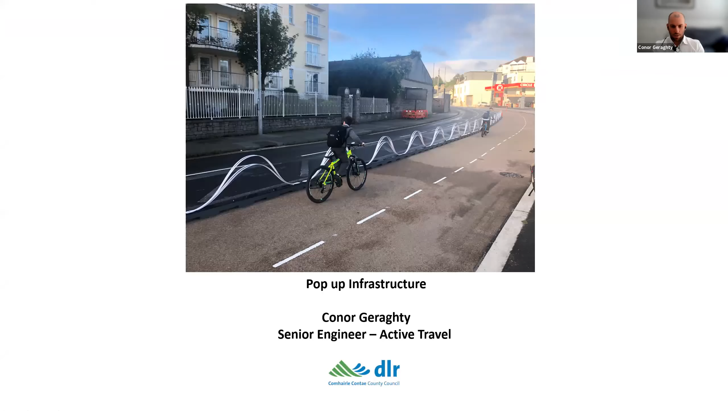It's showing, yeah, perfect. As Finola said, I'm senior engineer for Active Travel, and I've been involved in much of the pop-up infrastructure over the last 12 or 14 months. You'd be glad to hear this is probably the wordiest slide I have, but just to cover some of the basics about what pop-up infrastructure is.

To my mind, it's infrastructure that can be deployed very quickly, and it's often bolted down, working within the existing constraints and not requiring road widening or drainage alterations, and can facilitate things like parklets or cycle routes. It can be removed easily, which is one of its big advantages, that it enables things like trials to happen.

And why would you use pop-up infrastructure? Well, obviously the short design and implementation time is a real positive, but it also enables you to react to issues quickly, like the need for cycle facilities like the coastal route, or more recently the outdoor dining, where parklets and tables and chairs have been deployed in pop-up fashion.

It can also help resolve complex issues like concern over traffic movements or displacement and layouts. Pop-up infrastructure could be as simple as setting out a row of cones to make sure a resident could make sense of a particular new layout that's proposed, and it can facilitate those issues so they don't escalate too quickly at the early stage of a process.

One of the main advantages to it is that it can deal with the what-abouts. So what about traffic displacement? Rather than trying to go down a rabbit hole of modeling, or particularly in the moment during COVID, where modeling isn't really giving accurate results, you can use real-life trialing to deal with question marks that can't really be dealt with before something is built.

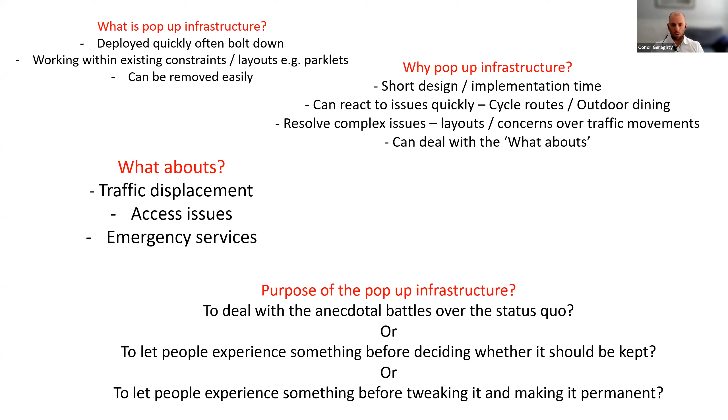So there are three very different, slightly different prospects, with the last one being a decision is taken to do something, and the pop-up measures or the trialing is a way to make sure that it works perfectly for everybody. The question is not whether it should or shouldn't go ahead.

If you're delivering pop-up infrastructure, the engagement is really important. We had experience last year where we were deploying measures without prior public consultation. So something like an adaptive build model is really important, where you've got this circular process where you put in something, you evaluate it, you talk to people, you see is it working or not. If it needs to be changed, it's changed, and then it's evaluated again. It goes around in this circular process.

One of my lessons learned from the whole thing is that you really have to champion the engagement. If you're open to change and you're making changes, that you're seen to be making them, it helps build trust with the people that schemes affect. Early versions of some of the pop-up infrastructure, by the time we had gone through a year of it, people know you, you've engaged well, and there's a certain element of trust that's built, which is really important, particularly for trialing.

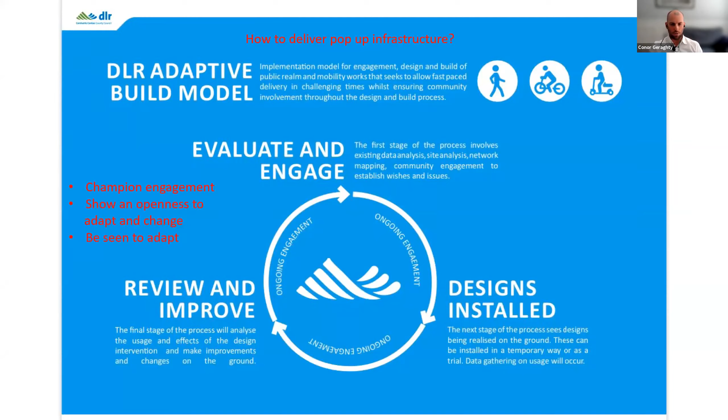So ultimately, what are we trying to achieve? It's active livable spaces. I think that applies to all of the infrastructure that we're looking at, even if it's permanent or pop-up. It's this style of an active landscape.

Not to quote Jan Gehl at an Engineers Ireland talk, but it's about the activity, the life between the buildings. Examples like this, where people are going around their daily life in an active way, but also that there's life on the street, that it's not just a place for movement through, that it's somewhere where people come and linger. This is an example from Dún Laoghaire of the Metals, where people come and sit and linger, and then they're more likely to spend money and spend time in an area.

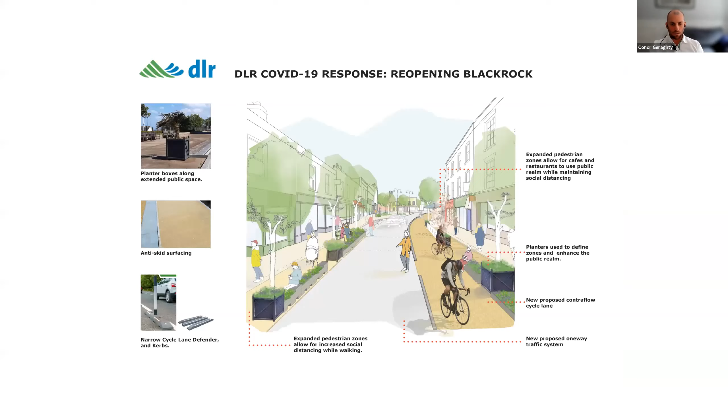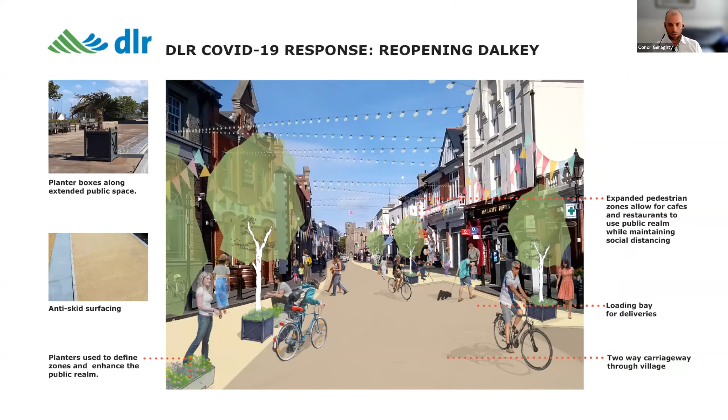One of the really good positives from pop-up infrastructure is the ability to do something really, really quickly. For those that don't know the coastal mobility route, it's a 4.5 kilometre route where 3.6 kilometres of it is two-way segregated cycle track, and that entire length was delivered in 5 weeks over 5 different sections.

Just to give you a sense of the speed of deployment: on the first day at 10 o'clock, when our road opening license kicked in, the cones were set out along the central line of the road and the top 2 cones were put in on the no entry sign. So pop-up infrastructure in its most basic form is traffic management. That first 600 meters is secured and the space is there for everybody.

By the end of day 1, all the lining had been burnt off and the parking bays were moved out. Day 2, all of the curbing was installed. Day 3 was bollards, and days 4, 5, and 6 were anti-skid on the first section. That became the limiting factor to the progress of the scheme, where we could deploy 3 meter wide, between 120 and 140 meters of buff surfacing along the route.

So after the first week, 600 meters was provided. It provided a link from Newtown Avenue, picking up the existing contraflow facility that was there, down to Seapoint Avenue. We did this section first, knowing that was probably the area that's going to get the most amount of cyclists.

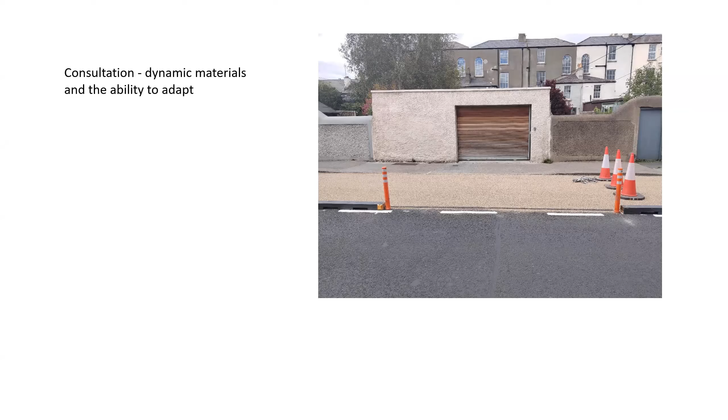If you see the timber curb on the right-hand side, it had a section cut off. We were able to just get the carpenter down - he took 500 or 600 mil off the curb and moved the bollard. It took 8, 10, 12 minutes, but it potentially removed somebody that might have had a negative impression of the scheme or object to it. It resolved the issue, and they were happy, and it helped build trust with the local authority that we did react to a genuine issue.

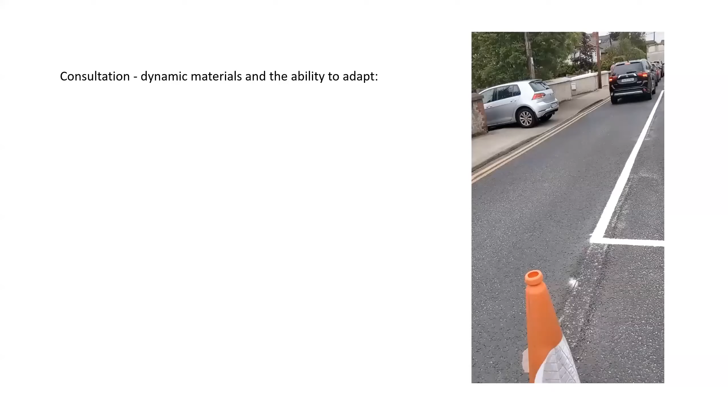Another example: people who always reverse out of their driveway and had never reversed in. Across a couple of different schemes, we arranged for traffic management guys to come down and hold traffic back and help residents try to reverse in - something they maybe had never done before. It gives them options that weren't there, like this particular person who wasn't able to reverse straight out because of the angle of their driveway, so the maneuver couldn't be done. But with a little help, they were able to learn how to reverse in and out, and that resolved the issue for them.

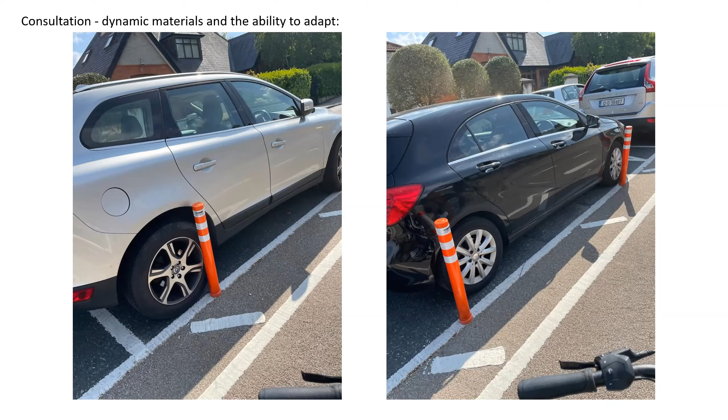Some other examples of the flexibility of the materials: we had provided bollards every 3 meters along the parking bays, but we were getting feedback that door openings were compromised by some of the bollard placements. So we went back and marked out the bays in specific sizes and the bollards in specific widths, so that if you're parked properly in the bay, it kind of hit on your wheelbase and didn't affect the door opening. Again, a very low cost intervention that helped deal with an issue at a local level.

And to facilitate the introduction of the route, a one-way system was put in, and a lot of people were concerned about the access for emergency services. I've personally witnessed 5 or 6 different responses along the coast, and the coastal route, apart from having no effect on emergency services, actually provides them with a corridor that's free from vehicles all the way along.

Cyclists are uniquely placed to be able to get off their bikes and onto the footpath if an emergency vehicle came along. I did a walk through or drive through with the emergency services, and some of the feedback I get is it's quite disappointing to see people trying to weaponize emergency service response as a way not to do cycle routes.

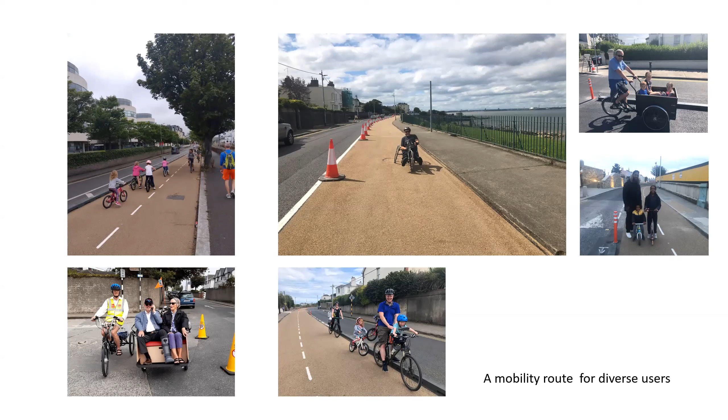So these are just a few shots from the route, and I think what struck me at the time when we finished it is this diverse range of users - young and old, people with mobility challenges. You see kids independently cycling from 8, 9, 10, and it's been a real eye opener for me that when you build high quality segregated facilities, it does attract all age groups, and it was great to be able to deliver it in a pop-up fashion. Again, just another shot of the type of users on the route.

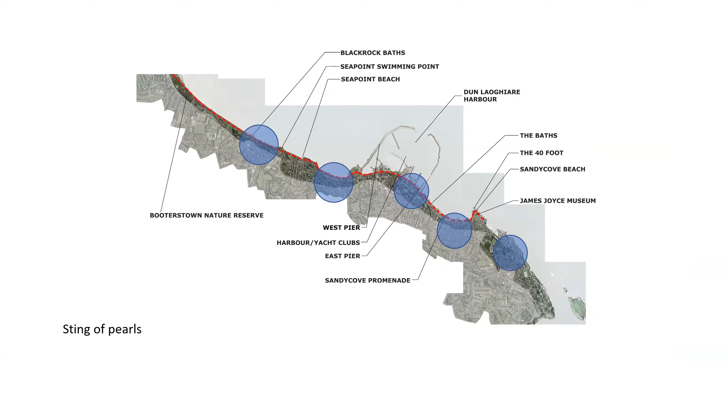I think if you take anything from this talk, a cross-departmental and multidisciplinary approach to projects is probably one of the most important things that you can do when dealing with public realm projects. And I think there's a really healthy challenging of views - conflict is probably not the right word - when you get people from different disciplines in together.

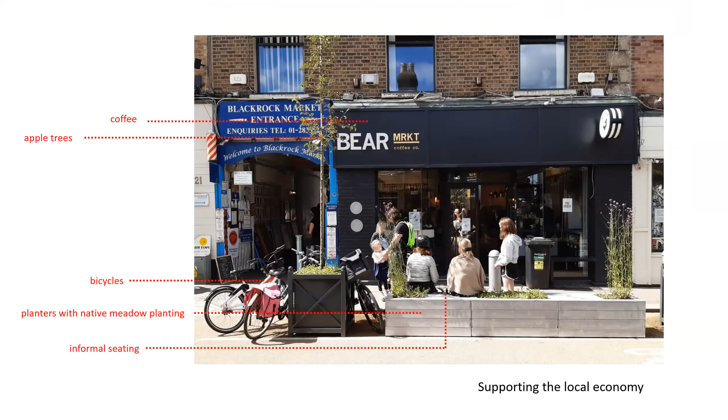Just another example of the dual use of planter boxes, where people can sit and linger in an area, providing extra seating but also the planting function.

Essentially it's a concrete that has granite aggregate in the mix, and a surface retarder is poured on it that's washed off afterwards, giving it a weathered look while being very much in keeping with the character and heritage of the town.

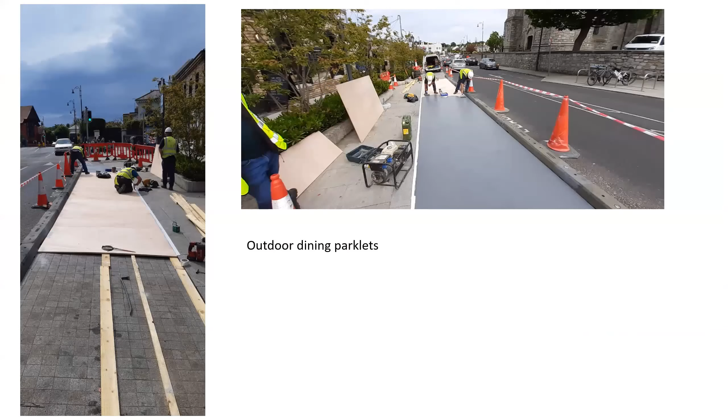Just a very quick slide on parklets, which we're looking at a lot at the moment with outdoor dining. Parklets can be popped up very quickly - this particular one is about 25 meters long and can be dropped in a day. They can then be dressed with the same style of planter boxes filled with plants, and personalized depending on the business. Developing a recurring theme and style to your planters and parklets enables you to react very quickly with stock pieces when needed.

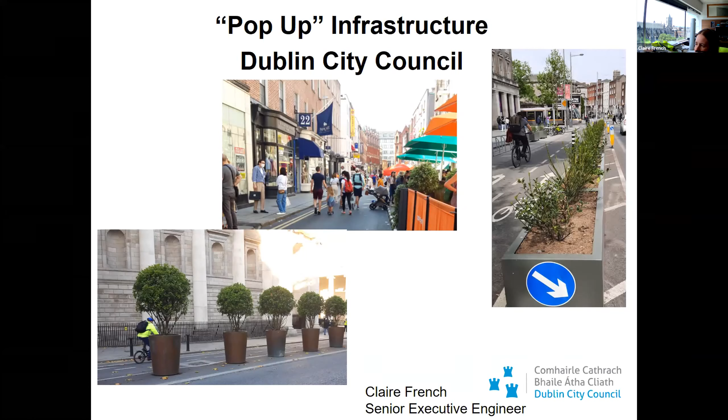Good afternoon, everyone. We've had a very busy 12 months here in the city, with some really interesting things happening for pedestrians and cyclists. From early 2020, the traffic department here, led by Brendan O'Brien, recognised that things had changed quite dramatically, and that the reduction in public transport capacity meant that when people started moving around again, walking and cycling would be extremely important to cater for some of that capacity normally used by public transport.

So a specific COVID mobility team was set up by Brendan, led by Patricia Reedy, who oversees everything, with different sections in it. I was looking after providing active travel improvements on the south of the city.

Connor's already touched on some of these, but from our point of view, some of the advantages of this kind of pop-up infrastructure are rapid deployment, the ability to trial different arrangements and materials. It's very easily adapted, it lets everyone experience the infrastructure, and there's scope to come back and improve and make measures more permanent.

So what have we been doing for pedestrians? One of the first things we started doing was a number of build-outs, to create additional space in key locations. They're quite quick to install with minimal civil works and disruption.

So it's all about reassigning some of the space for the pedestrians. We started out on Nassau Street, where there was a new contraflow cycle lane put in early last year, around April, May, which created a bit of extra space that we decided to reassign for pedestrians.

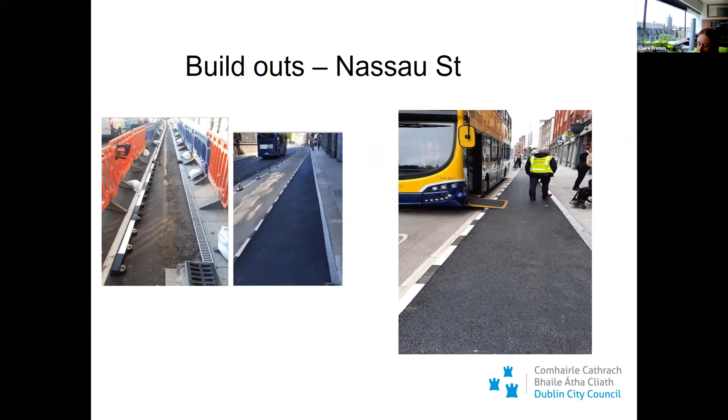So this was used as a trial for this. A very simple method: we just use ready curbs, which are bolted down, with eco drains for drainage, and then asphalt to form the space. We worked with and liaised with our drainage colleagues and made a few changes both to the drain type and how the drainage system works.

We carried out a trial with some of the disability groups as well. Although this isn't a bus stop, we trialed it as a bus stop, and we learned a lot from that, which we then took forward into our next target, which was down in College Green.

There's a number of locations in College Green that are normally very busy with pedestrians passing through and also with pedestrians waiting at bus stops. This was the first one that I looked at, in the centre of College Green. So the space was given to pedestrians, both for those waiting for the bus and those passing through.

Again, we invited the disability groups out and trialed it, and they were much happier with this, the slope and the drain type. So we now had a blueprint to go forward.

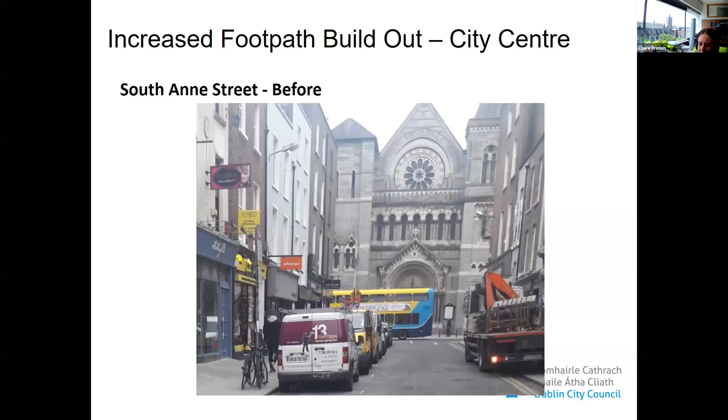I suppose what we were doing wasn't going unnoticed around the city. One of the first places that actually approached us was a group of businesses on South Anne Street back in early June last year. They were looking to see if they could get some of the carriageway space to provide room for tables and chairs.

This is what South Anne Street was, which had a line of parking and loading on one side. The first thing we did is simply close it off, which gave us a chance to see if there was any issue in the street in terms of the effect on loading and parking, but there was none. The street coped very well.

And so during our pedestrianization trials, it was an instant success. It was well used by the restaurants and cafes on both sides of the street. While we were out there on one of the Sundays, they approached us and asked, maybe could we look at doing what we'd done down in College Green for them.

So I went out on the Monday and had a look, and yeah, it was certainly doable. We were out there within a week and started to build this. Again, it's a very simple construction: the curb is bolted down, we put down a layer of sand, we've the eco drain for drainage, and then we put the asphalt on top.

They do vary—this is just a different location—and most of them don't actually need any additional drainage. If they do, we simply put down an additional pipe with a connection to the roadway to catch any runoff. We finish it with a buff colour, and the street is pretty much instantly transformed.

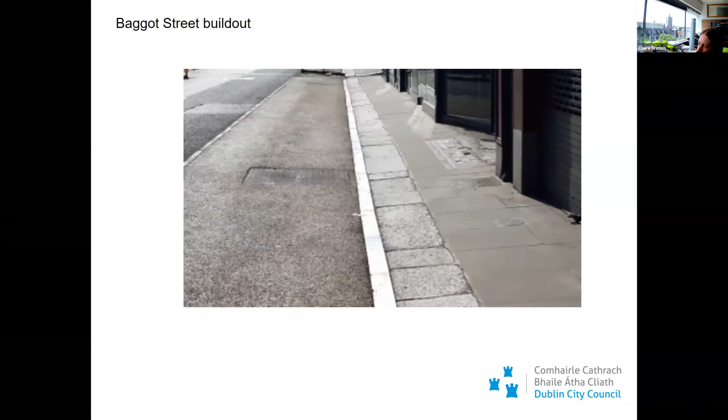Most of them on South William Street are just for pedestrians rather than outdoor dining. It's just another one up on Baggot Street, again, which is additional space for pedestrians. And when you see the build-out beside the original footpaths, you really see how narrow the footpath was before that.

We're also using them at public transport locations, so at various bus stops. So it's gone in on College Green, up on Parnell Square, which were kind of the tightest locations.

And then for outdoor dining, again, dedicated space for outdoor dining, dedicated space for pedestrians. Footpaths are cleared, and it's a real bonus for anyone looking for outdoor space. We've about 20 of these done now at this stage, mainly around the Grafton Street area, Merrion Row, Baggot Street and Capel Street.

Now that everyone sees them, everybody wants them, but it's not possible to provide build-outs at every location that's looking for one. So there are a large amount of cafes, restaurants and bars looking for space, and we've been dealing with them all the way through since last summer. But the number of applications has shot up in the last 4 weeks - we've had nearly 100 alone. I suppose we would love to build out footpaths everywhere, but we have neither the time nor the resources to do that many in that short space of time.

So we had to look for an alternative when it came to reassigning carriageway space, especially outside the very centre of the city. We needed something that was temporary and removable later on if needed, something that was very quick to install due to the sheer number we have to do, something that would provide some reflectivity and protection and awareness to vehicles that there was something happening here. Something that had a bit of height on it, so it wasn't a trip hazard, and something that maybe looked a little bit better than bollards.

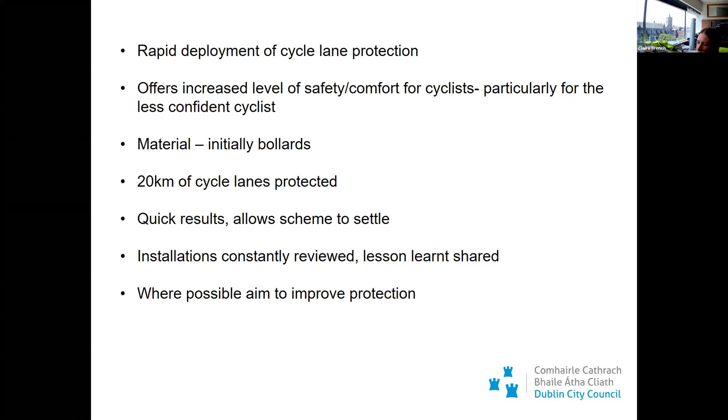In terms of a pop-up, the advantages are rapid deployment, and it gives an increased level of safety and comfort for cyclists, particularly less confident ones. We've mainly used bollards initially, which has allowed us to protect about 20 kilometers of cycle lanes in the last year. The guys out there putting these bollards in have been phenomenal - a huge amount done, out there at 5am every morning. Very quick results, changes things straight away and allows them to settle so we can see it. We constantly review them, learn from them, take lessons onto the next one, and where possible we improve the cycle protection.

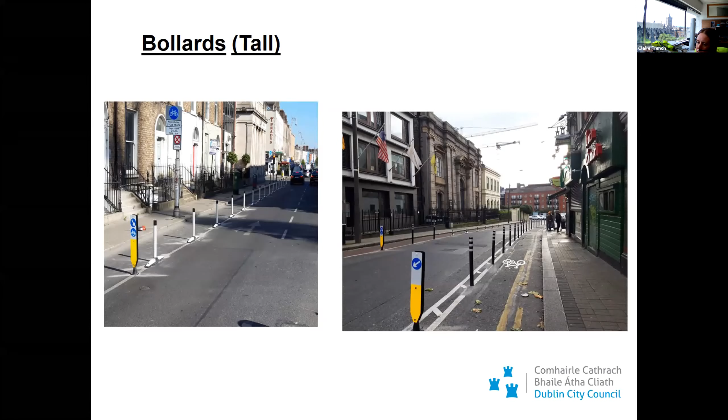We started pretty much in early April last year providing space for both cyclists and pedestrians. We have a number of different materials - some are just bollards, the taller ones, where we don't need to provide curbside access for vehicles, like on Richmond Street and Wexford Street contraflow cycle track. We also have the shorter bollards, the Sherkins, where sometimes access is needed to the curbside - we used more of them in the beginning, but we don't use them so much now unless there's really no alternative.

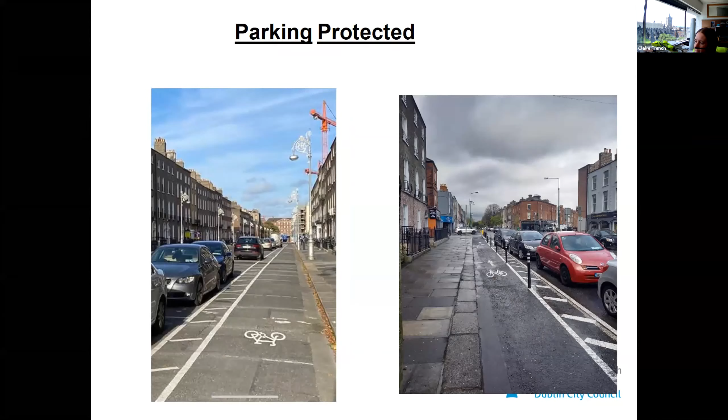Parking protected cycle lanes - this was Fitzwilliam Street on the left and Blessington Street on the right, the contraflow cycle track. Moving the parking out itself provides protection to the cycle lane, provided we can give a good buffer between the cycle lane and the cars.

On the North Quays, one of the schemes looked at very early on - there was just a bus lane with shared cycle facilities, two lanes of traffic and parking. Back in April 2020, one lane of traffic and the line of parking was taken away, and the space was assigned for pedestrians and cyclists with these red barriers up initially, placed pretty much all down the North Quays.

But working with our parks department, those barriers were never going to be there long term. We managed to install these planters instead, which totally changed things in front of the forecourts there. So instead of a line of traffic and a line of parked vehicles, you have a much quieter, much safer, and much calmer space, in quite a special location.

These ones on College Green - I put these in quite early, extending the cycle track that was there and protecting it with planters. Because it was May at the time, we just put in flowers and quite a few bollards. But we went back to it, replaced them with trees, got rid of all the bollards, including the ones on the footpath itself, to create this planter protected cycle lane.

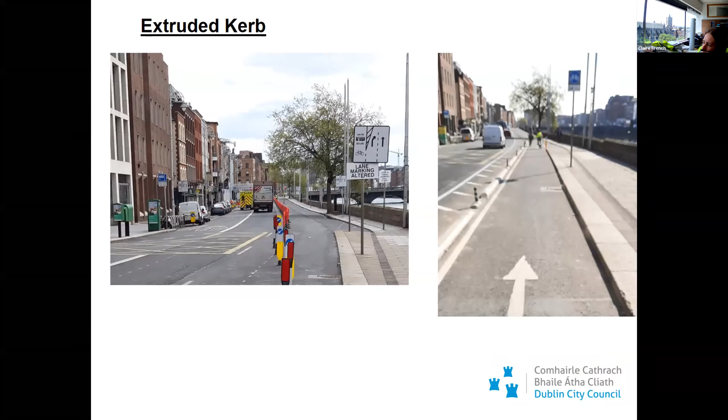The other method we're using for protection of cyclists is the extruded kerb - again this is on the North Quay. Initially these red plastic bollards were replaced by this extruded kerb, and it's also used up on Constitution Hill. Where we have the space, and depending on the setting, it's certainly our preference in terms of visual appeal and the protection it provides - it's much less intrusive than the bollards or some of the other things we use.

And it's also used successfully on Griffith Avenue as well, with the buff colour.

Just a quick note, as well as these pop-up cycle measures we've been putting in, we have also opened up a number of longer term projects in the last year.

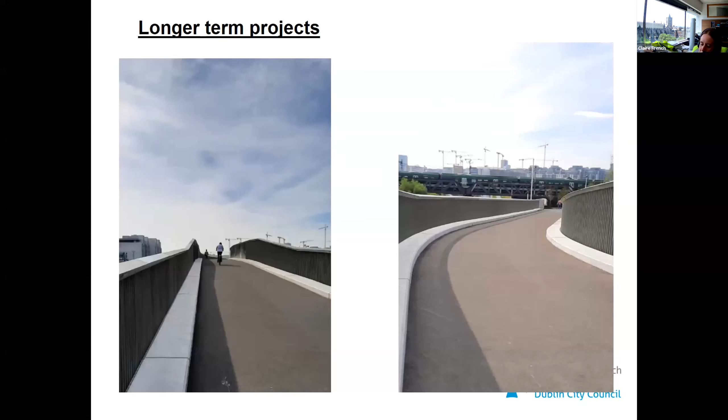The Royal Canal Phase 2 opened last summer, which was a bridge both over and under a railway line. And on Seville Place, there was some pop-up infrastructure.

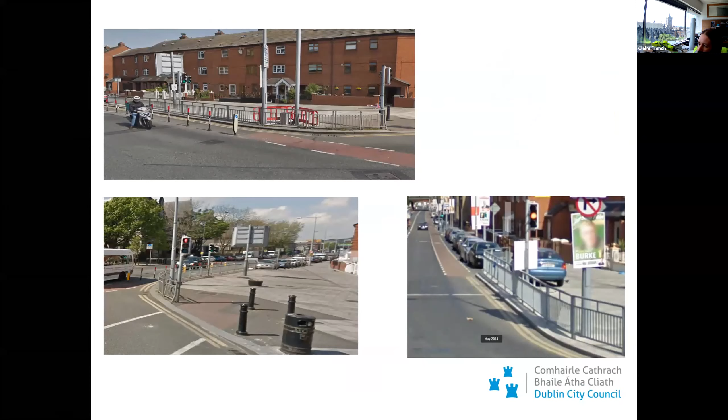After a cyclist was killed, these bollards were put in, but it was a bad junction for cyclists with the railings and everything. But the railings actually provided a safe space for children who lived there, who used that space as a playground.

So the parking was taken away, the railings were taken away, and protected cycle facilities were put in. A garden was created to provide that safe space for the children, but also to brighten the place up and improve it.

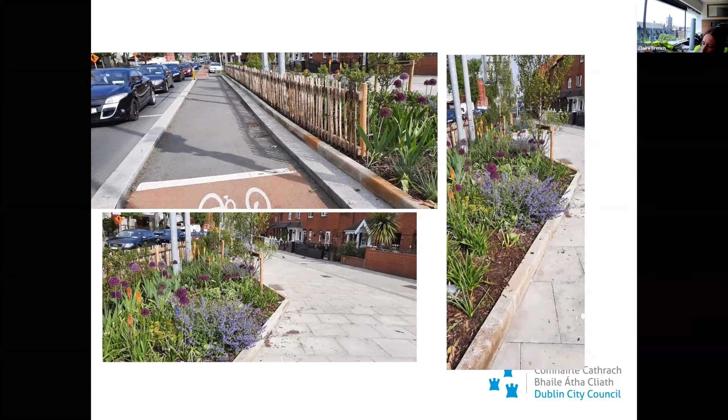Have you seen much change in volumes in the last year? Well, the traffic volumes are now back up to about 80%, and they've followed pretty much what's been happening in terms of restrictions. Obviously, they dropped significantly back last April and have been up and down a bit since then.

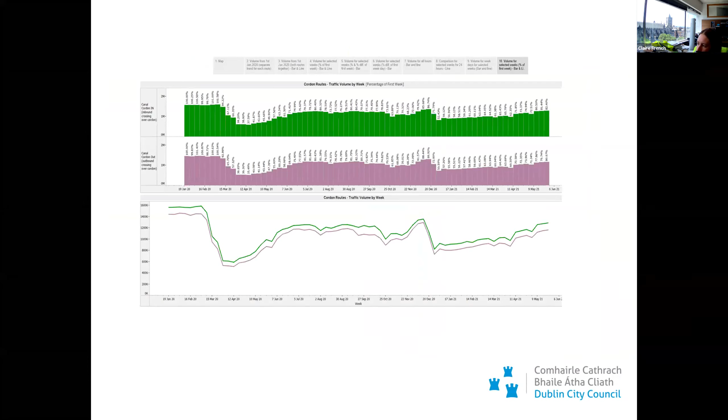Has there been an increase in cycling? Well, our commuter cyclists haven't yet returned, but we hope they will when they start going back to the office. What is positive is that, looking at the weekend cycling numbers from the first 3 months of the year, compared to 2019 and 2020, they grew by 46%. So that's very encouraging, and hopefully people will keep it up who've started cycling in the last year.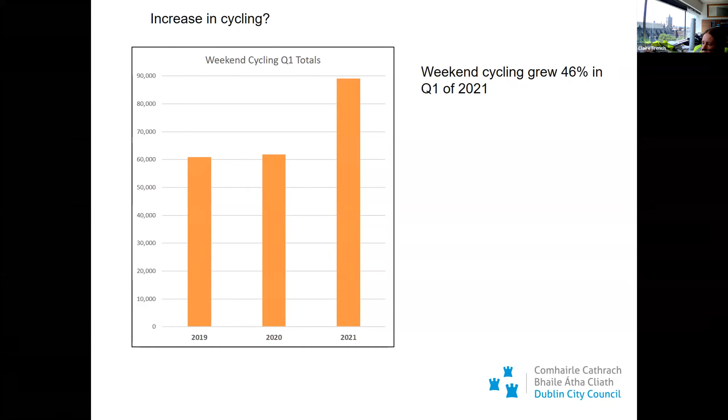In the city centre, just for May, the last few weekends compared to 2 years ago, on Henry Street the pedestrian numbers were actually greater than they were 2 years ago. So there are plenty of people still coming into the city and walking around. Grafton Street hasn't recovered as well, but it certainly has recovered a bit in the last few weeks.

So just a very quick note on consultations. We have done a lot of them over the year, and when we're doing them, we just want to think: what are we looking for? What sort of feedback do we want? And at what stage of a project?

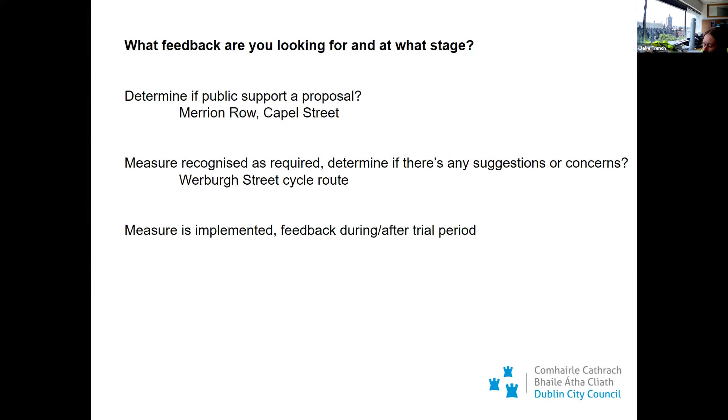So we just want to see if the public support a proposal, something like Merrion Row or Capel Street. Have we already recognised that maybe there is a measure required? So if people have any specific suggestions or concerns, something like Werburgh Street cycle route? Or do we put the measure in and then ask for feedback during or after the trial?

So something like the Grafton Street area pedestrianisation. It very much depends on the project, what stage it's at, and what information we want people to give us.

So these are just the consultations I've read in the last year - almost 21,000 submissions from quite a few different projects, and quite different projects as well. So I feel I have a reasonable idea of what people like to see and what they don't like to see. But it's great to get such engagement from the public.

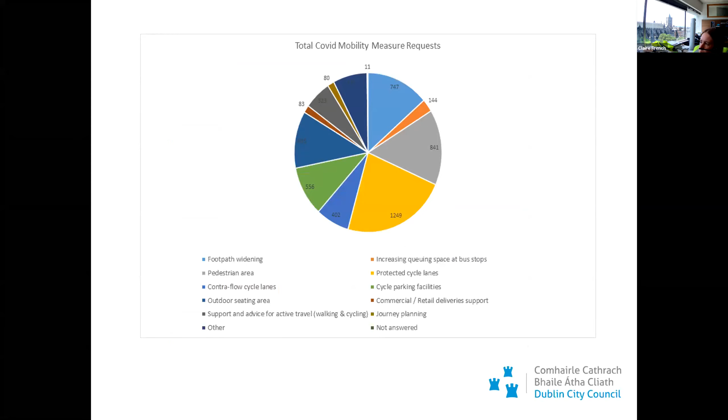As well as that, we also had our COVID mobility request forms. We've had about 5,000 requests for that. We're still working our way through them. But again, it's great to get these suggestions in and get the engagement from the public.

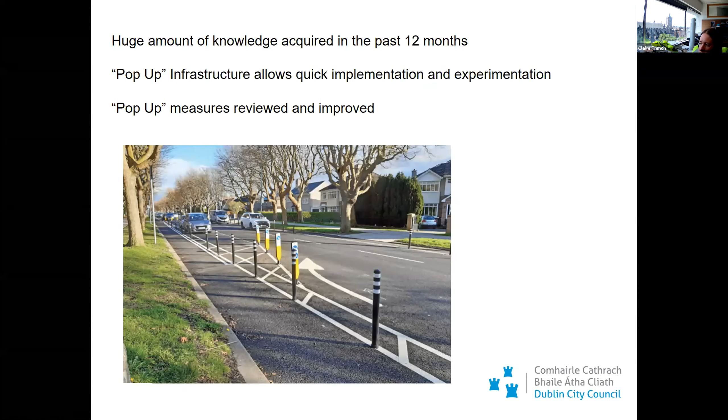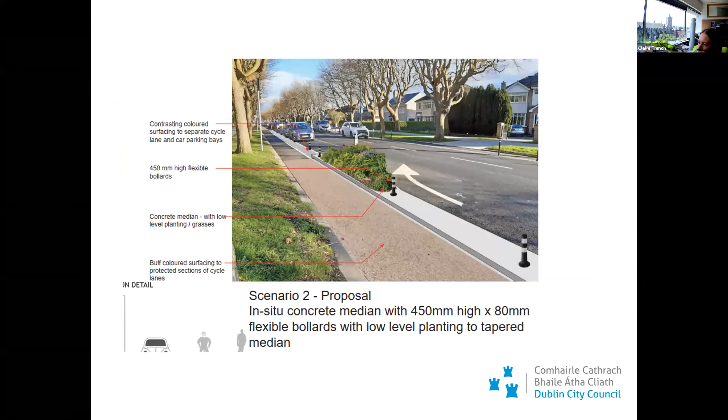So just to finish up, there's a huge amount of knowledge we've acquired in the past 12 months. This pop-up type infrastructure allows for quick implementation and experimentation, and we are going back and reviewing these measures and improving them where we can. This is just one example here on Griffith Avenue where bollards were put in. Our city architects and parks have been working with us now to draw up a number of proposals for improvements.

Which is what we hope to do for most of these locations as well, whether it's providing curbs or greenery or a bit of both. So, going back and reviewing these, finding where they work, and then hopefully taking away some of the bollards and improving the area. That's it. Thanks for listening.